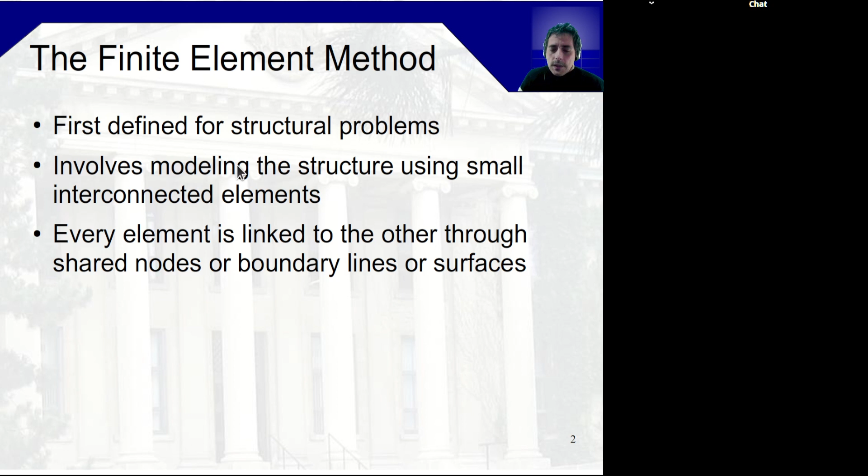Each element in that concept is linked to all the others through shared nodes, or boundary lines or surfaces if you're talking 2D or 3D. So you have these surfaces that connect the elements, but the nodes are where things are getting calculated.

Yeah, you have a question? No. I have a feeling that...

So you can certainly select this - first you need to discretize your domain, and... let me just check one thing.

So first we need to discretize the domain, just as we needed to do in the finite difference method, where usually we would have a grid. It doesn't need to be a regular grid even in finite difference. But in finite element, you can more easily follow the shape of the elements, so the specific grid in the back is not so much needed.

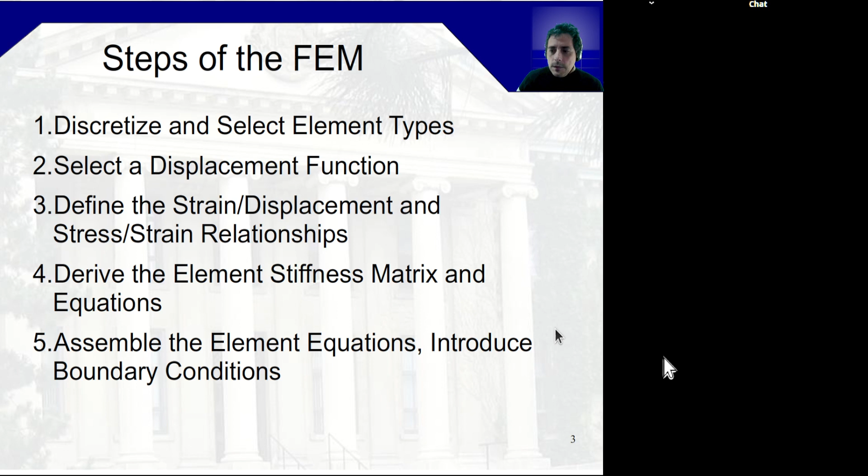So you define the stiffness matrix for each element, and then your job is to assemble the individual elements into a bigger matrix. Then you introduce your boundary conditions, and once you have those, you can solve, calculate your displacements and your reactions, and then as usual you have to interpret the results.

So first step: discretize and select the types of element. Steps 1 and 2 are tightly related because the element types you choose will determine the number of nodes, and based on the number of nodes within a given element, that's what determines the displacement functions you'll use for interpolating within the element.

So you select the type and shape of the element, and what's important is that the element must be small enough to give useful results and large enough to reduce computational effort. And remember, although we don't have in finite element a specific requirement as we do in finite difference...

particularly in time-dependent finite difference problems, where we need to make sure that when using the explicit finite difference method, the term 1 minus 2r is always larger or equal to 0. That requirement doesn't exist per se in this method, but it still gives you an idea when you choose a specific time step or a certain size of elements—it will still constrain you to the time steps you can use.

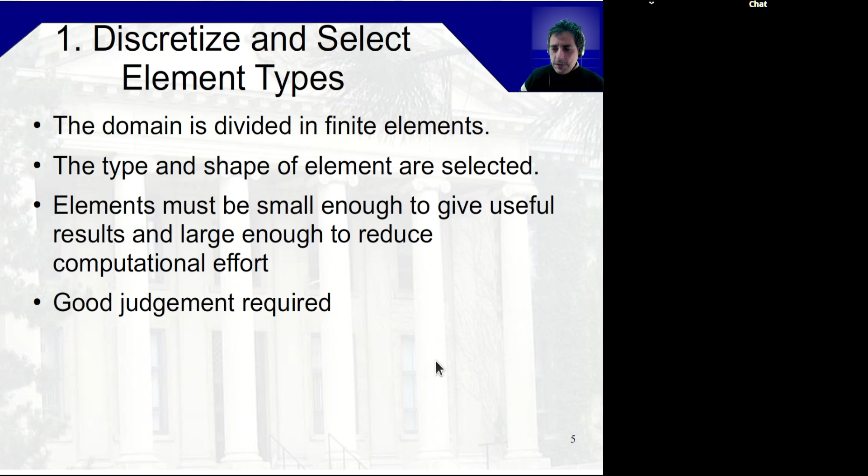Oh, okay, thanks. Thank you for mentioning. Let me make sure that I have the auto switch on. Okay, yeah, because of the initial technical difficulties, I forgot to turn it back on.

Thanks. So we ended up having our equations, right? So hi minus 1, minus 2hi, plus hi plus 1. Now, you remember this was the case of the steady state?

Okay, now just to examine these statements a bit more, we had already defined...

Oh, you're still getting me? I seem to be. Okay, I'm sorry about that. I really don't know what's going on. No, I use the national... well, that's not the issue. I've been having excellent connection all day. I use National Capital Freenet, which uses basically Bell's phone lines. No, no, it's not through Rogers. It's basically using the DSL lines that I'm using. Um, and it's something strange, just at this particular time. I'm not sure, it might have to do with the network itself, but it's strange. So in any event, so I have this.

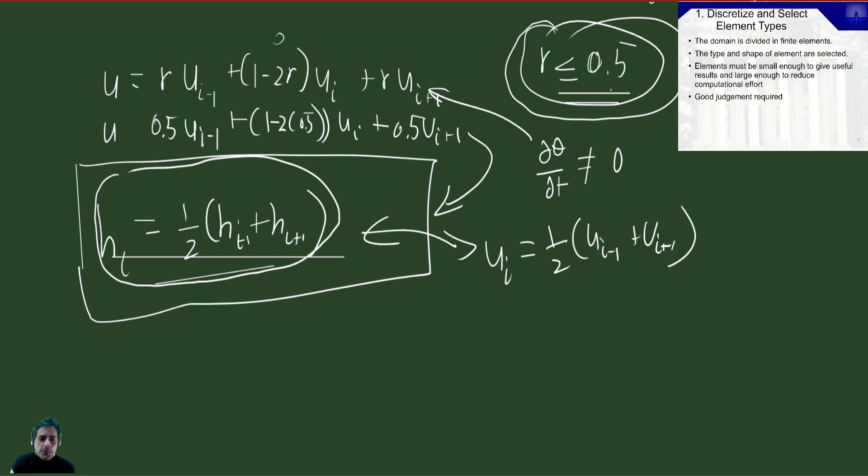We ended up with a general equation that, when we set it to its possible limit—the maximum speed at which we can have things travel—we basically got the same equation as saying steady state, setting steady state as our equation and solving it iteratively rather than in one step through inversion of a matrix.

I just thought that was an interesting detail to show you. So when we use finite element, we always go to the solution using inversion of a matrix. The finite difference method has multiple ways sometimes to solve the same problems.

In the finite element method, you have to generate this matrix, invert it, and solve for it. You do have to choose your elements wisely to optimize the computational effort and have sufficient resolution in your problems.

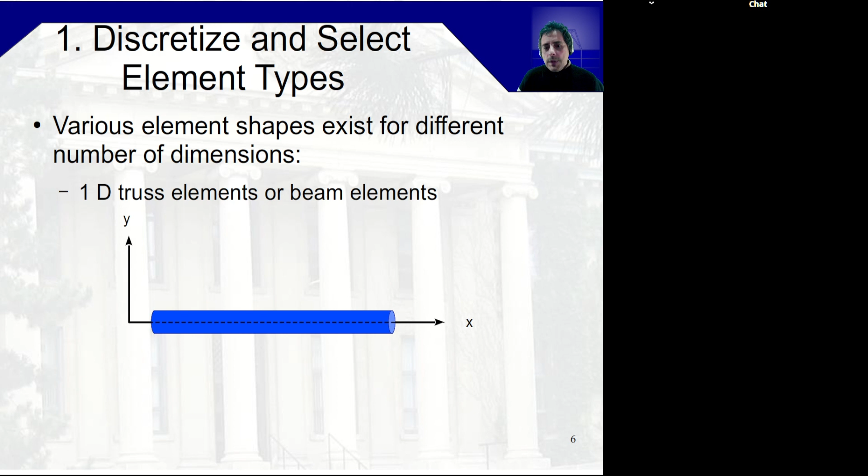So you have different types of elements that you can use. For instance, in 1D you can use 1D truss elements or beam elements. You can have bending, you can have compression, depending on which directions it can go. In 2D, you will use flat elements.

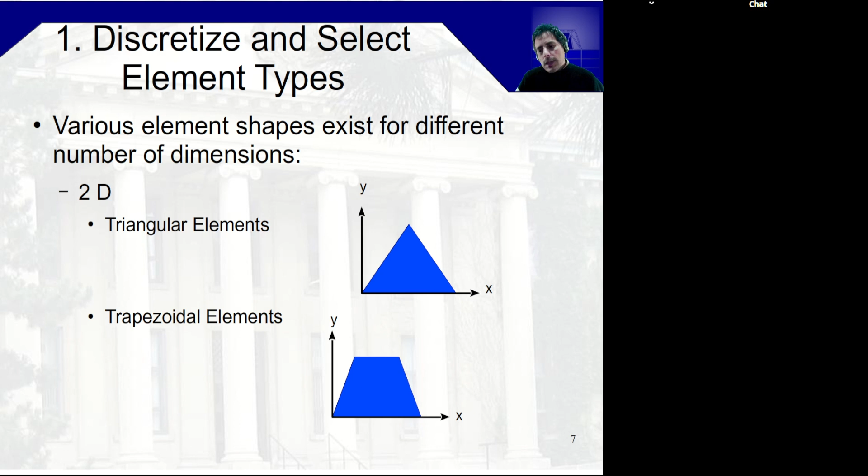The simplest is the triangle, and within them you can do linear interpolation. You can use trapezoidal elements. As you add nodes, you end up changing the functions that you use to interpolate within the element.

You can use prismoidal elements in 3D, with tetrahedral elements being the simplest. As you add sides, then you add nodes, and your interpolation functions—your shape functions—are different. Of course, you can also do 2D that tries to be 3D, as in axisymmetric problems.

Once you've chosen your elements, depending on the type of problem you have to solve, the second thing you have to do is select a displacement function. The displacement function is chosen within each element—that's an interpolation function within the element.

You only need it in the end once you want to be able to calculate the changes within any element. It's like solving your finite difference problem and then trying to find values at intermediate positions—you might use an interpolation function to use the nodal values and calculate values anywhere in between.

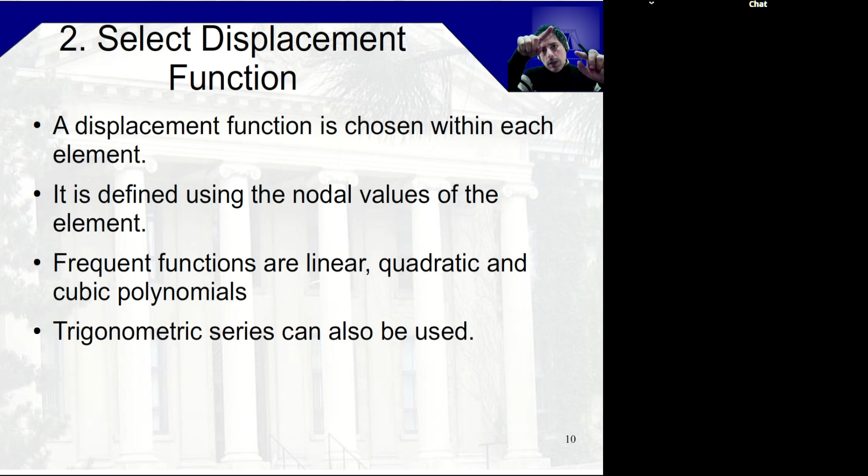Then you have to define your strain or displacement, stress-strain relationships. For 1D, for instance, you can define the linear strain as the displacement, the change in position over x or the direction—change in length over the direction.

And then you relate that to the stress using constitutive relationships. Again, for simple elastic deformations, your constitutive relationship is Young's modulus times the strain. So you define the strain in terms of

change in positions in each direction, and then the stress is therefore the strain times the Young's modulus. That's your constitutive relationship.

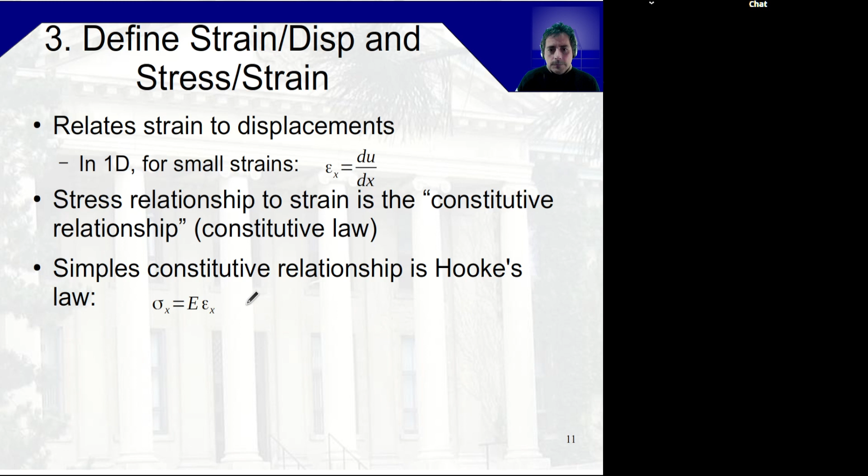And then you build the element stiffness matrix. There are different work methods to determine the element stiffness matrix. We're not going to go into detail on all of them—this is a very cursory, very brief overview.

There are other courses that concentrate entirely on finite element methods, so we're really just going to breeze over these methods in this class. But there are different ways that you can generate your stiffness matrix, making different assumptions, and some are more appropriate depending on the type of problem you want to solve.

So, do these methods have any advantage over one another? Yes—when you have finite elements, which is better depends on the technique. Probably the work energy method, or the method of weighted residuals, I would say is the most general application. Once you have a differential equation, it's the one that will generally allow you to solve more types of problems. It's the more general way of formulating.

Basically, you're doing the same thing in all cases, but the method of weighted residuals is one you might want to research a little if you want to implement the finite element method on your own, because it allows you more flexibility. Galerkin's method is one of the branches of this method. Yes, you have these methods exactly—that's the most general.

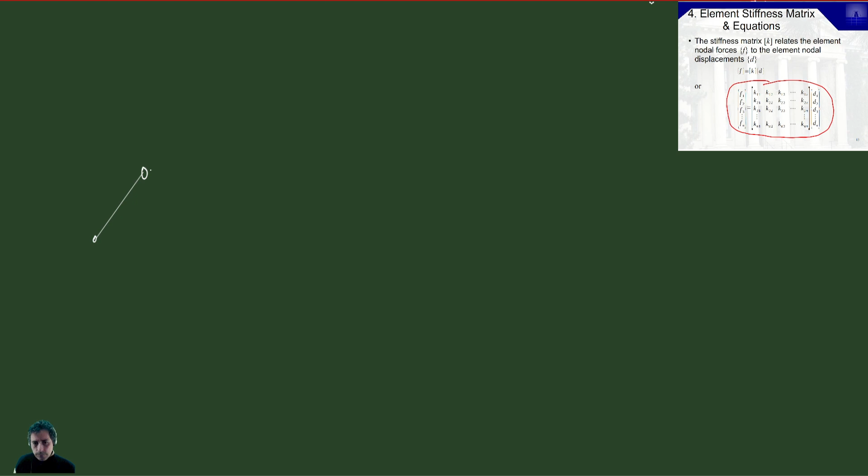And so they will be related in the global sense. If you have a list of all your nodes in your domain, you have a structure defined somewhere in space.

Okay, so you will have nodal displacements. This is a 2D problem, obviously, although each element is 1D in the case of a truss, so it does simplify many things, but the displacements are still 2D.

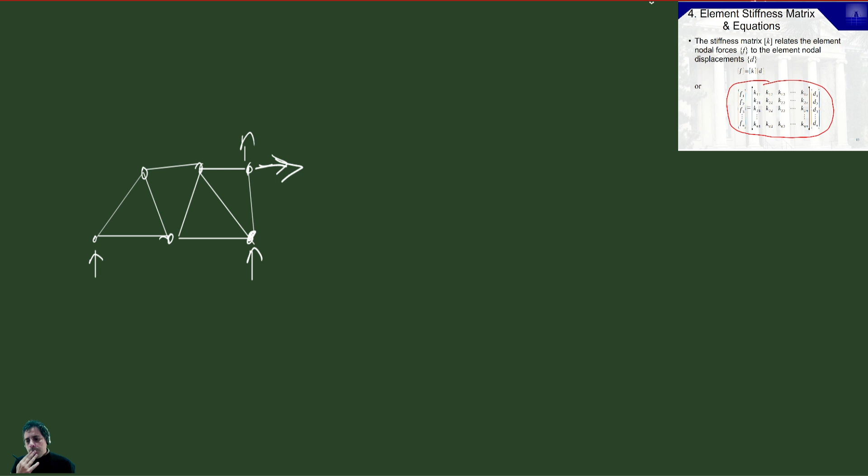And so you need to relate the forces that act overall, so you'll have boundary conditions at the boundaries and applied forces at given nodal locations. And then you'll have the general stiffness matrix that relates that to the displacements. So you want to be able to solve for the displacements, but also the forces that exist.

Now, the direct stiffness method allows you to superimpose elemental nodal forces. And so you're able to divide things into the individual elements, and later on you can combine them to build the general stiffness matrix, the global stiffness matrix.

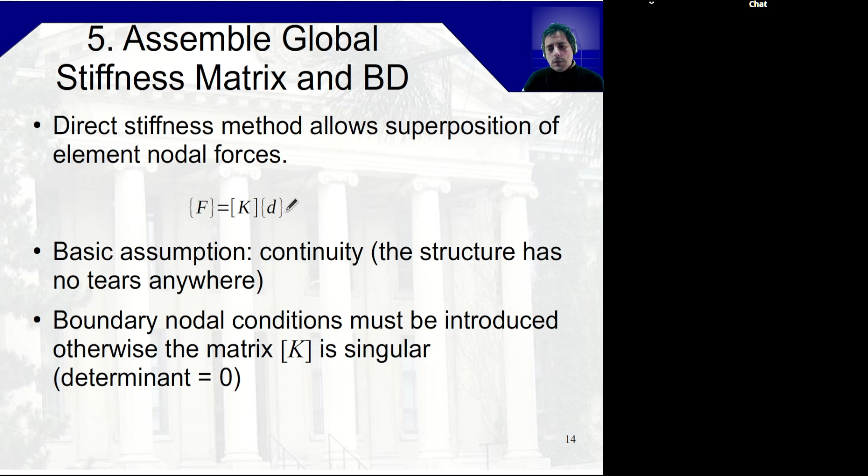So the basic assumptions to do this is that there's continuity, that the structure has no tears anywhere, and you need to introduce boundary conditions at some nodes. Otherwise, you have a singular matrix. You cannot solve it. The determinant is 0, and if you have a determinant equal to 0, it means that you cannot solve the matrix.

So if you have n, a total number of degrees of freedom, then you'll have to go to a matrix that is n by n, basically, because you have vectors of n elements. So that's all depending on the degrees of freedom, which are the number of nodes multiplied by the things that you're measuring at each node, right?

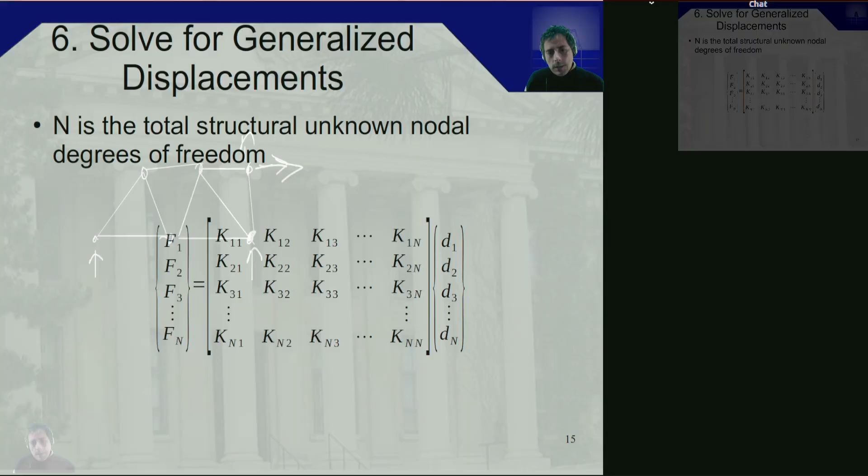So in this particular case of a truss, what you have is displacement in the y direction and displacement in the x direction. So you would have 1, 2, 3, 4, 5, 6 nodes times 2 degrees of freedom per node. So basically 12 global degrees of freedom.

If you had beam elements, then you would have to also measure rotation, and so you would have another degree of freedom at each node.

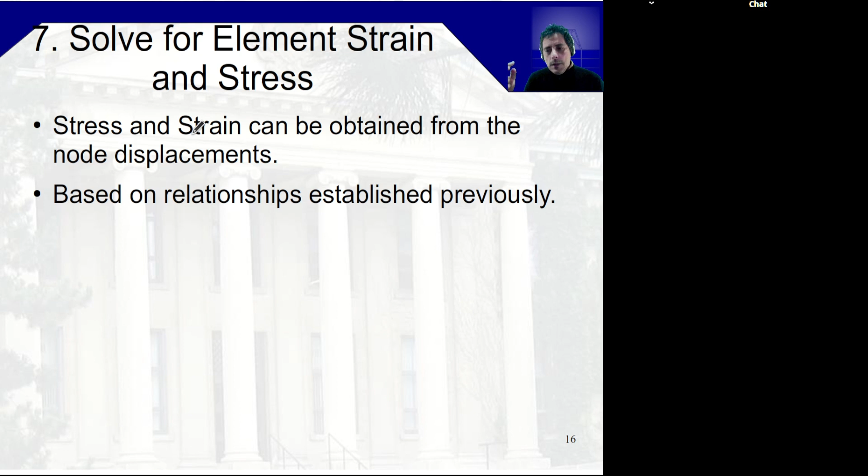So you can get stress and strain from the node displacement, and then from there you can interpret things within. Interpreting the results, that's important in all types of problems, not just for finite element, that's also for the finite difference problems, right?

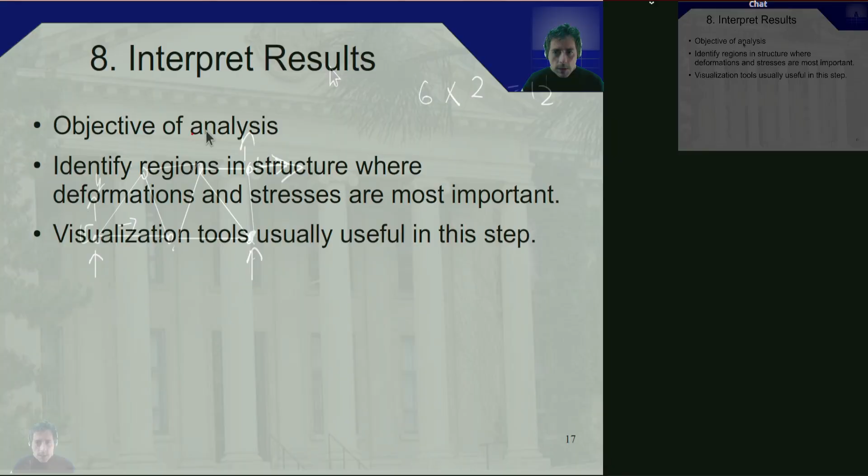So if I give you a problem, whether you solve it by finite element or finite difference, I give you a dam. Maybe it has a clay core of some sort. And so you do an analysis of flow. You identify the ground or the phreatic line, right? And then you can generate contour lines for your equipotentials, right? And they will be tighter.

You have more head loss within the clay, so you will have all kinds of interesting things happening there. Whether, however, you've solved for that problem, interpreting what it means, interpreting what are the consequences of those, will be your job looking at the analysis.

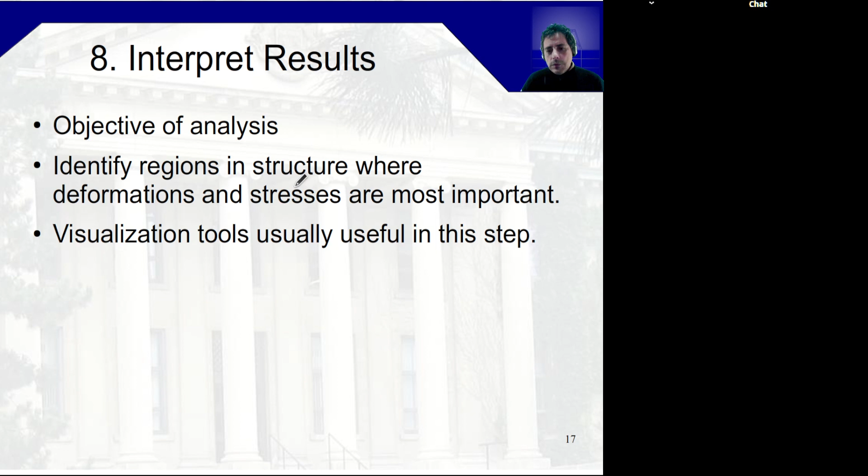So whenever you have, say, equipotential lines that are closer, then you know you have higher head loss, you have greater gradients, and likely less flow, and the flow will tend to prefer the path that has less head loss, right? So same thing when you're dealing with stresses, you'll have to determine, look at the picture, look at the data, and identify what's more important. So usually you need to have some nice visualization tools for this step to be able to make the most of the information you get.

So if we want to look at this, let's look, for instance, at a 1D spring element. So this is the simplest form of a finite element problem. And in the case of a spring, then the spring constant is equal to AE over L.

If you can imagine that you have a bar, we can represent a bar if you have a steel bar like in a truss. But in this case, we're doing 1D problems, so you would imagine bars that are only lined up like this. It's a 1D problem, so you could represent the spring constant of a bar as AE over L. So the spring problem is not only good for solving spring problems, it's also good for solving bar problems.

It's also good so if you have a bar in torsion, you can then use the polar moment of inertia and the shear modulus over L, and then you can model bars that are in line in 1D and then are being torqued. So you could have bars in 1D and that you simulate how you torque them and have the torsional movement. So the 1D spring element can be used for other things than just springs.

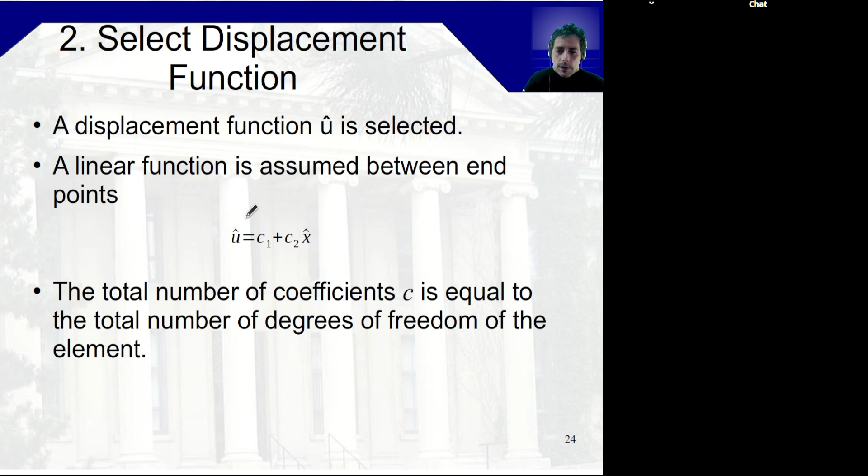So you have the deformation equal to constant 1 plus constant 2 times x. The total number of coefficients c is equal to the total number of degrees of freedom of the element.

So basically the displacement is based on the relationship: you have 1, x, so x at any position along the bar, times the vector made by c1 and c2.

So how do you define this? You need to define your displacement, or your function u, at the nodes. So you have two nodes, you can be either at 0 or at L, where L is the length of the element.

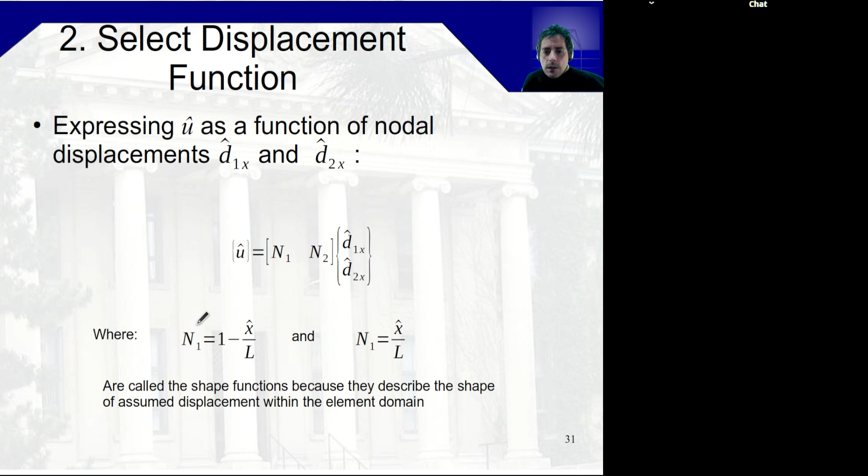So you have x over L times displacement 1 and displacement 2. N1 and N2 are your shape functions, and in the case of the 1D spring element, N1 is 1 minus x over L, and N2 is x over L. So basically one is measuring that direction, the other one the other direction.

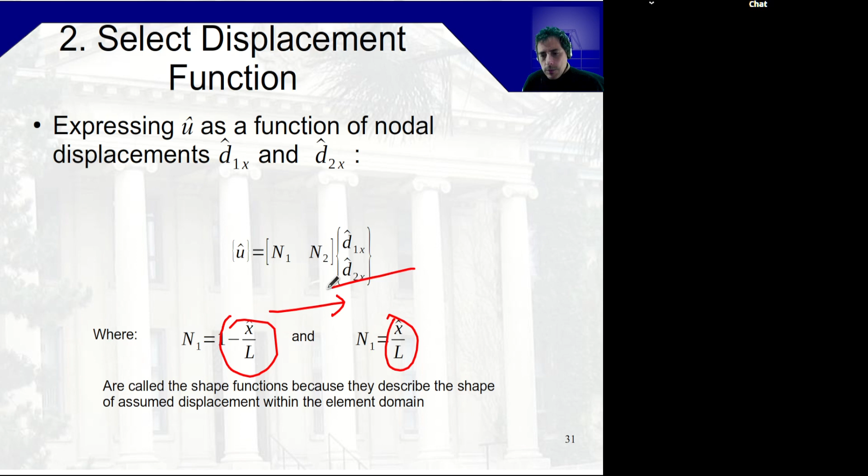So what is the constitutive relationship that you can use in this particular case? Obviously your constitutive relationship is the tension in the spring. You are breaking up a lot.

Let me see what I can do, if I can do something. I'm not sure what to do. Let me try something, I will come back shortly, see if it improves things. Just a sec.

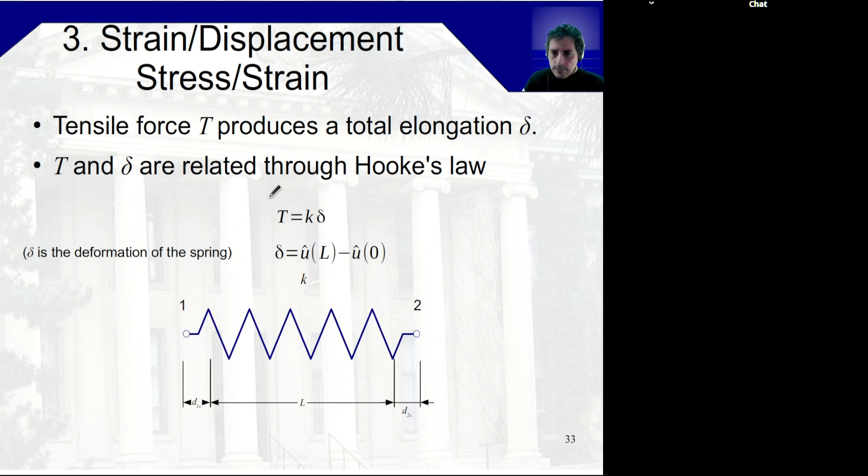Okay, you have the spring constant times the difference in displacement between the two ends, which is delta. So you have the difference, displacement at L minus displacement at 0 - it's basically the difference in those two displacements.

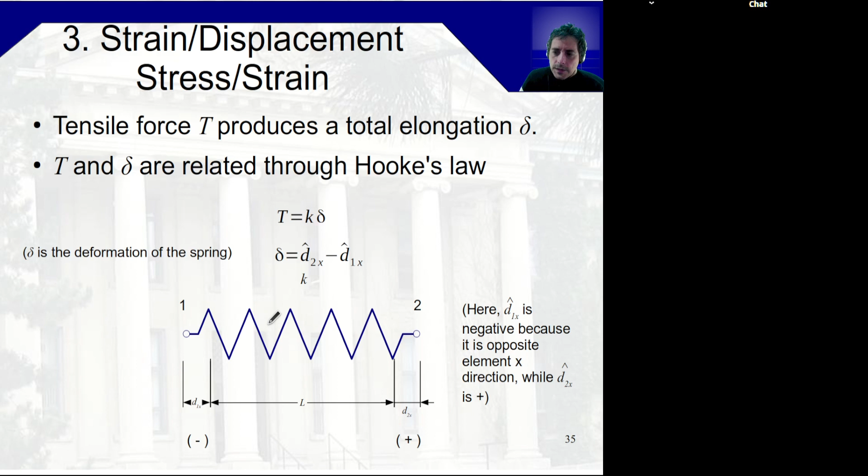And so in this case, d1 has a negative sign and d2 a positive sign, because they're in opposite directions, in the particular model.

So you have the sign convention: minus t at the first node and plus t at the other node. So we have both the tension and the displacement, which is the difference between the two nodal values.

So you replace that into the equation. At the first node you have minus f1x, which is the reaction or force at the first node, so it's equal to the tension, k times the difference in displacement. And at the second node you have k times the displacement difference.

So what changes is that obviously we have d1 minus d2 and d2 minus d1 when the values are - here we had minus f1 and this one we have f1, so that's why we ended up inverting the two signs. If you express it this way, you're relating the nodal forces f1 and f2 to the nodal displacement through the spring constant, and so we have here our constitutive relationship.

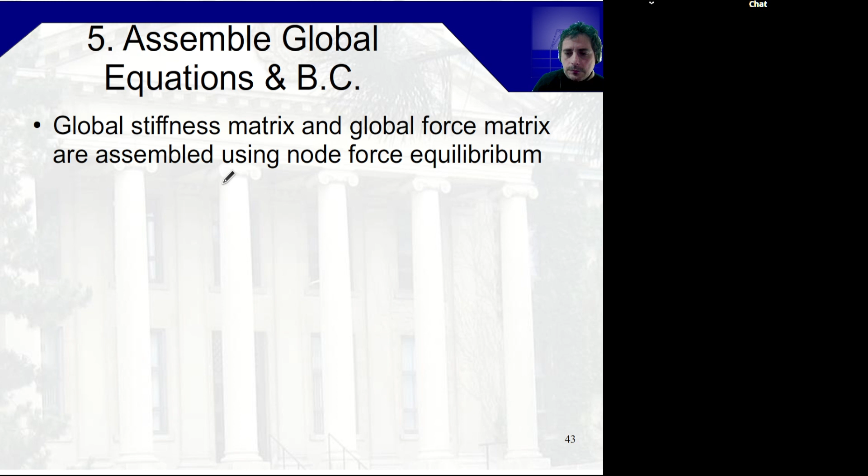So we have a symmetric square matrix, and then we can solve the global stiffness matrix by assembling them, so we would assemble them based on their nodes.

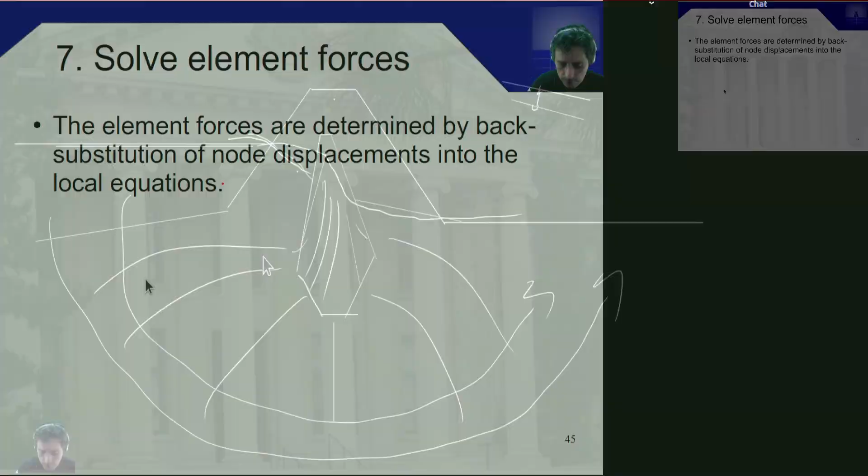So in terms of the nodes... oh, I'm missing a part here. Just missing an important window for my use.

So if we have a set of nodes, this is node 1, 2, 3, 4, that's element 1, element 2, element 3. So for element 1 we have, looking back at our equation...

So what did we have for element 1? Well, we have node 1 and 2. So we have K1, K2, K3, and we would have these two values there. So what would it be equal to? It would be equal to K1, minus K1, minus K1, K1.

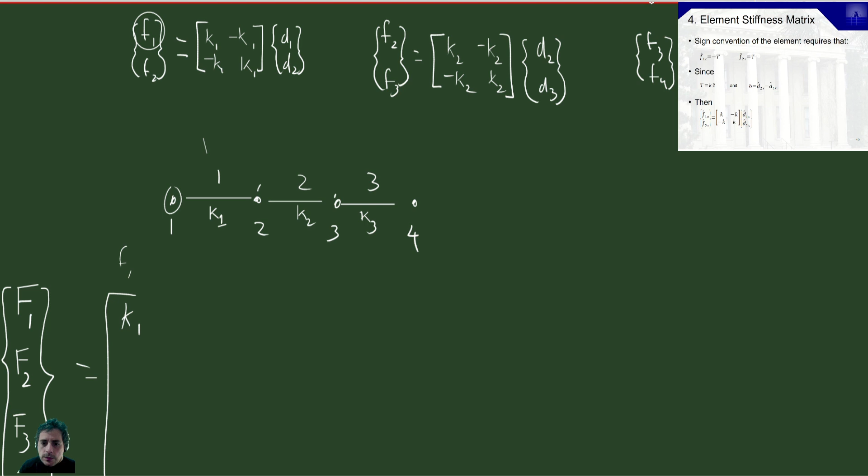Right, and so now we have to find the element. So F1 at 1, we look at F1. We have K1, with respect to D1, and then with respect to D2 we have minus K1. So that's what we're going to look at now, how we assemble these things into the global matrix. It's going to be faster if we look at this example, but we're basically going to add the values from the different elements.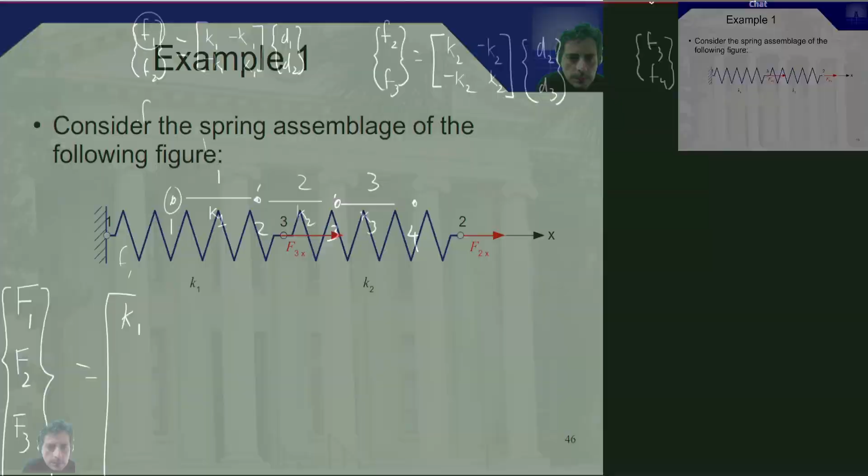Okay, so we had K1, so with F2, and so this means that F1 equals K1 D1 minus K1 D2, right? But if we were looking at F2, F2 was equal to minus K1 D1 plus K1 D2, and F2 was also equal to K2 D2 plus minus K2 D3.

So if you have here your nodes, you have displacement 1, displacement 2, displacement 3, displacement 4. And so for the global matrix, this is in terms of D1, D2, and so on.

So you have here for D2 and F2, so you would have minus K1, and for D2 it would be plus K1 plus K2, but it would also have, as a function of displacement 1, minus K1 times displacement 1, and then in terms of displacement 3, minus K2. So you end up with a matrix like that with elements from all of them.

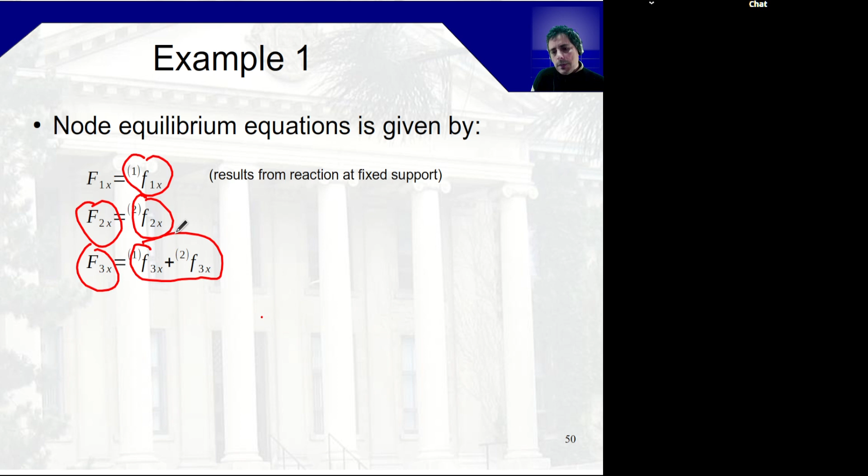Node equilibrium means that global F1 is equal to the element F1, global F2 is equal to the element F2, but global F3 is equal to the sum of both element F3. So we express them in this general fashion.

So F1 will be equal to whatever we have there for F1. There's only one term with F1, so it's K1 minus K1, D1 and D1 and D3. This is F1, this is F2, because F1 is equal to K1 D1 minus K1 D3.

F2 is equal to minus K2 D3 plus K2 D2. F3 is equal to minus K1 D1 plus K1 D3 plus K2 D3 minus K2 D2. So this is the term that we have here, basically just expanding the stiffness matrix.

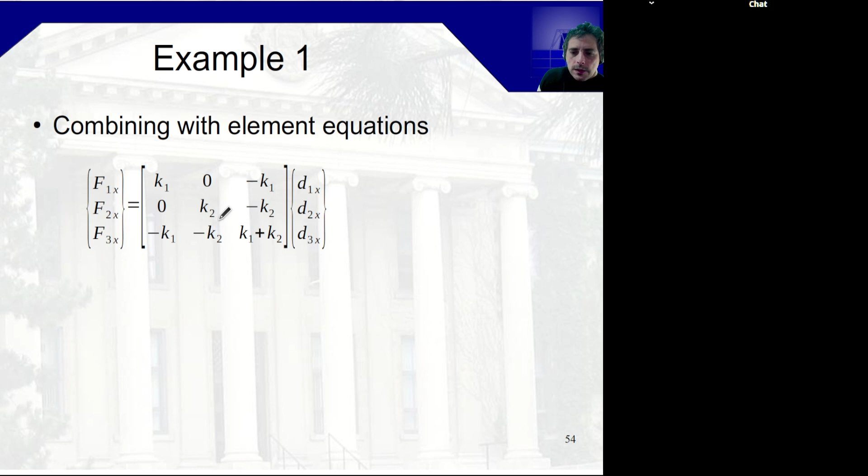We replace those. So if we order these D1, D2, D3, we just place the K values where we needed them to be. And so this is our global stiffness matrix. Call it global, that's how we usually refer to it.

So in terms of direct stiffness, we can just look at our individual stiffness matrices. This is the direct stiffness method, and so we add, whenever this belongs to node 1, this is node 3, so at node 3 we will be adding the same values.

So D1, D3, D2, D3. For element 1, it means that we have 0 in turn, so element 1 only depends on... let's build it here for element 1. Element 1 only has nodes 1 and 3. And so our final matrix, we know, will have nodes 1, 2, 3.

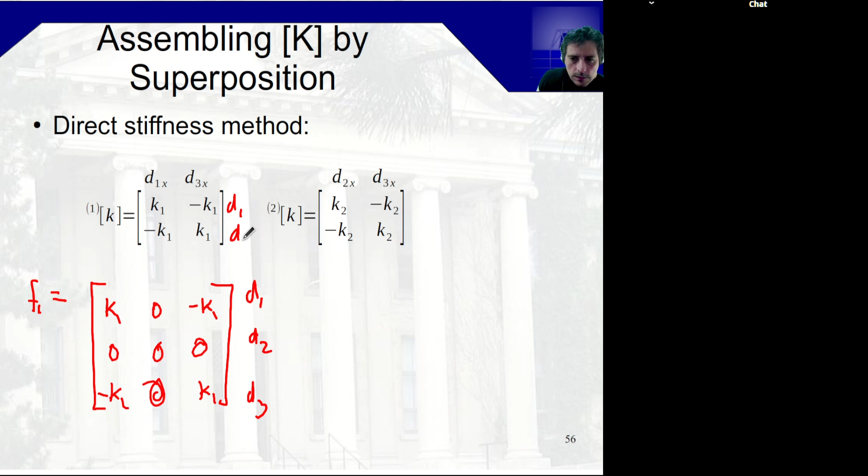But still, F1 has, in terms of D1, it has K1, and then it has D3. So in terms of D1 here, we have minus K1, and then K1 for D3. Zeros everywhere else. So that's D1, D1, K1. D1, D3 minus K1, D3, D1 minus K1.

Okay, so for F2, same thing. Position 1, 2, 3. So here we have 2. This is 2, 3. 2, 2. So that's K2. Position vertical 2 and 3, minus K2. Then we have 3 and 2, minus K2 and K2. And everywhere else we should have zeros, right? So that's what we have here.

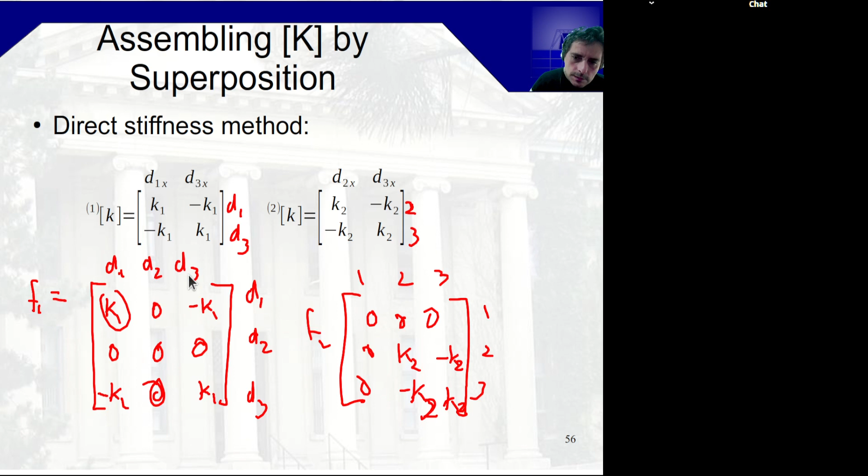That's basically how we build those matrices, and once this is done, because we are organized, I can have my global stiffness 1, 2, 3, 1, 2, 3. So position 1, 1 is this plus 0, so K1. Position 2, 1 is 0 plus 0, so it's 0. Position 3, 1 is minus K plus 0, so minus K1.

Then 1 and 2 is 0 plus 0. 2 and 2 is 0 plus K2. 3 and 2 is 0 plus minus K2, and then we have minus K1 plus 0, minus K1 minus K2, K1 plus K2. Okay, so we just assemble them that way.

And of course we can take out each of these values if we want, but we now have to consider the equilibrium of each of these functions. So we have K1 times the initial matrix times deformations, or we just assume the global stiffness matrix. So forces, the combined forces must be referred to the resulting values.

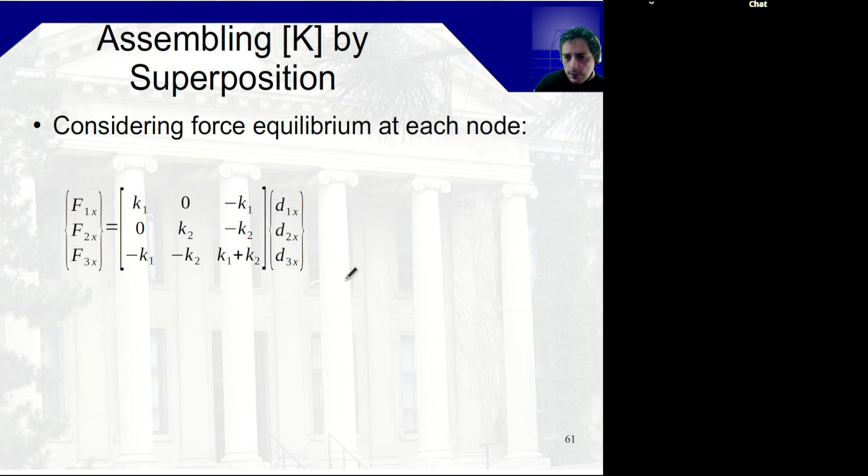And so what we know is that D1 must be equal to 0, that's one of the boundary conditions. We know that the first node cannot move, so we set this value equal to 0, and that's a fixed end. We also know f2 and f3, so because of that we can remove the first row, first column. This row and column are known, so we can remove those from the problem.

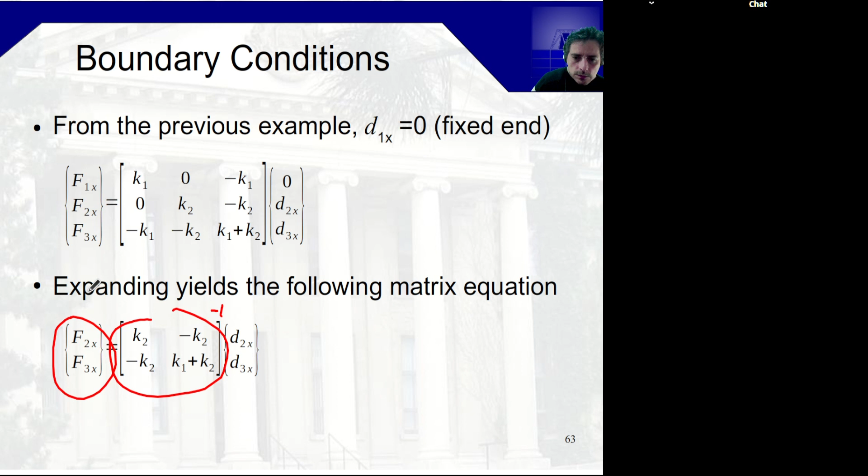We didn't know this value, so we were able to get it out of the equation. And now all we're left with is the two known forces. Potentially this could be 0 if we had no value there, but what we have to do basically is find the inverse of this matrix, multiply by the known nodal applied external forces, and that will give us the displacements.

So now we have the displacement at each location, and then we can go back and find our nodes. Once we have all the displacements, we can go back and find the reactions at each of the intervening forces.

Okay, so basically we can express... this is just resolving it algebraically, but we would have been able to resolve it numerically otherwise. Okay, so now we'll do another example with...

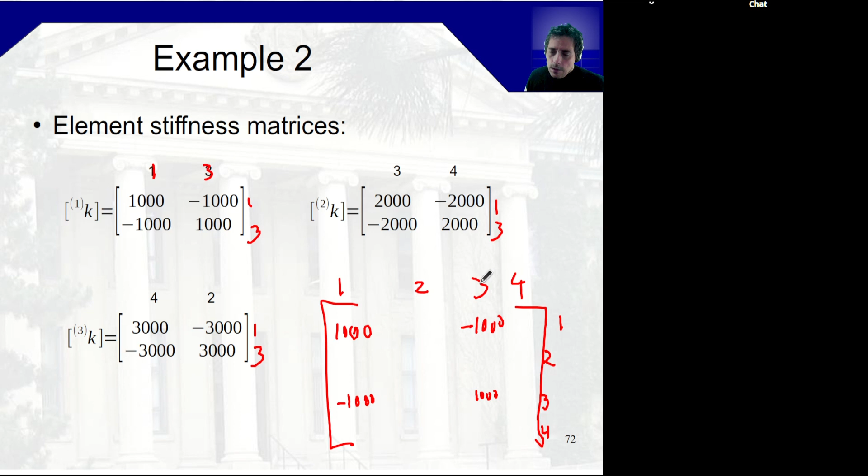Then we go to element number 2, which is 3, 1, 2, 3, and 4. So we go to 3. Oops, that's 3, 4. That's 4 and 2. So 3, 3, 3. So we have 2000. So 1000 plus 2000. Okay, so that will be 3000.

Then we have 3, 4. That's minus 2000. 4 and 3. 3 and 4 will be minus 2000. And 4, 4 was 2000. Okay, then we go 4, 4. So 2000 plus 3000.

2 and 4, it's minus 3000. So that's 2 and 4. And then we go back to 4 and 2. 4 and 2, it's minus 3000. And 2 and 2 is 3000. And the rest should be 0, 0, 0, 0.

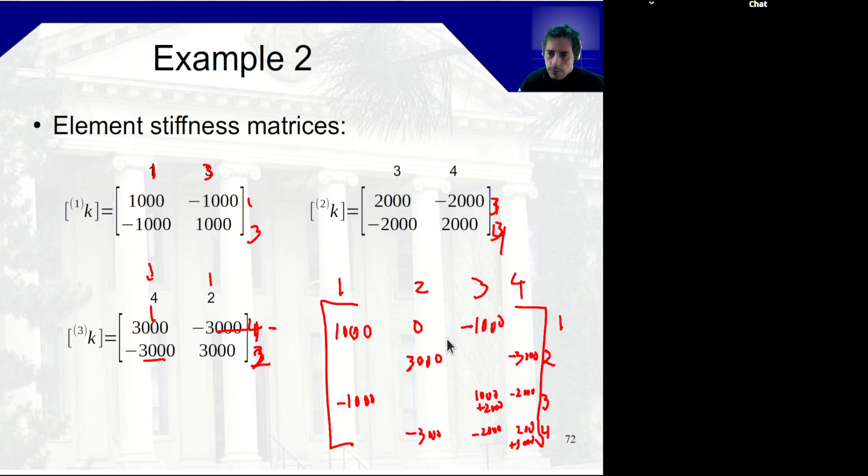So 2000 plus 3000, 2000 plus 3000, 1000 plus 2000, 1000 plus 2000 minus that. So you see there's all the values that we had there, and this is how we would build it from the matrix we have there. Okay, so this gives us our stiffness matrix, global stiffness matrix.

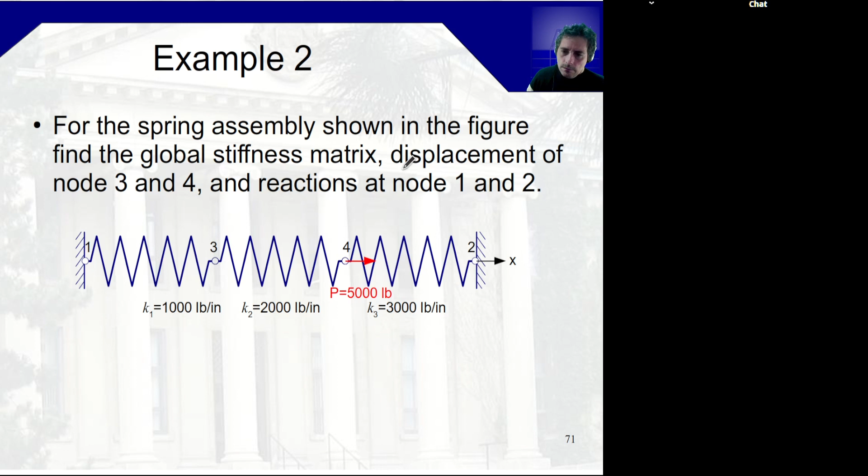We express the force at each of the nodes with respect to the displacement at each of the nodes. We also know that at nodes, what was it, 1 and 4? 1 and 2, okay. 1 and 2, we have 0 and 0. Okay, so 3 and 4, 3 and 4, we have 3 minus 2000 and 2000, so

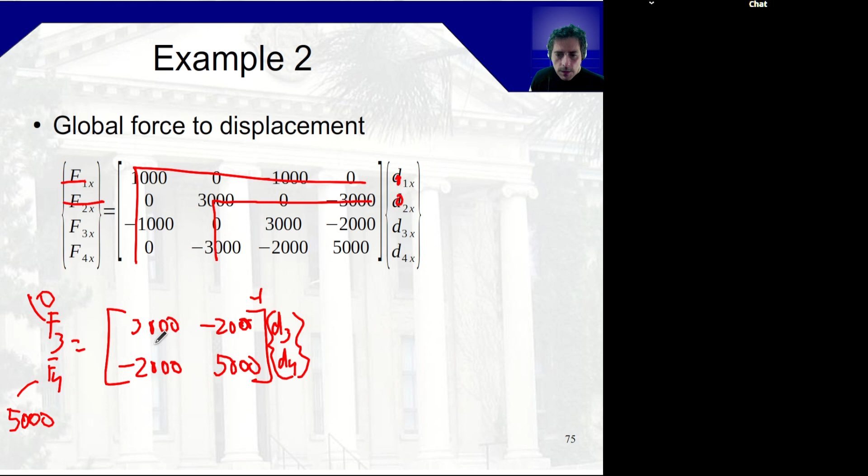Right, d3, d4, and so we find the inverse of this matrix. This one was 0 and 4, 5000. Okay. So that's 0 and this is 5000.

So we have the inverse times 0 and 5000, which will give us the displacement function. Okay. And so we can express that

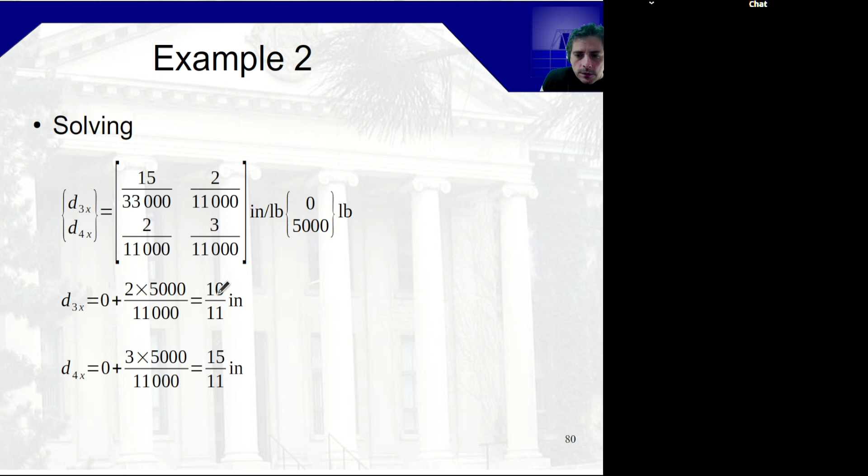in terms of their values. So we have displacements d3 and d4, 10/11 and 15/11 of an inch respectively. And if we put that into the overall system, we can find the reaction at 1 and the reaction at 2.

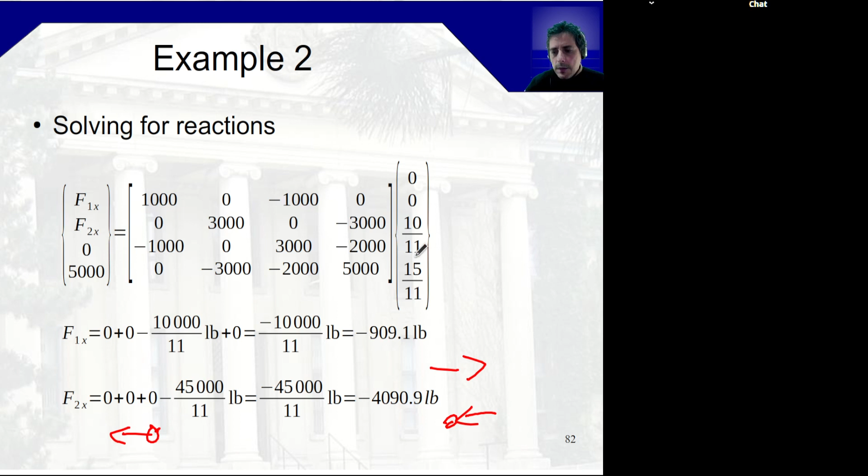And so that's the direction of the force. So the force is going positive in that direction. So it means that the reaction at 2 is in this direction. And similarly, the reaction at 1 is in that direction also, which means we have a tension here and a compression there. Okay, so that's the direction of the force in absolute terms.

So you can find then your reactions at each of the individual nodes if you want. And basically that's how you solve these little problems. Okay. Does sound straightforward so far?

Okay. So now we're just going to briefly talk about the material models. If you use SIGMA/W, you will find that you have different material models that are used internally. So SIGMA/W is the finite element component of GeoStudio for mechanical behavior, right?

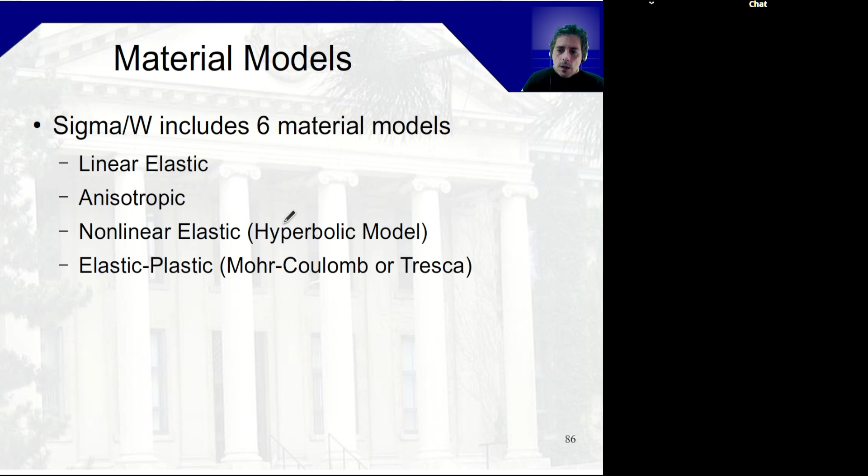So in terms of the elastic model, it's just relating stress and strain linearly using Young's modulus. You also need the Poisson's ratio, because when you're deforming a component mechanically by applying loads, this is the main difference between stress analysis and things like flow through porous media, where we had Q dependent on the difference in head in each direction. It's separate there, but here we are linking the Poisson's ratio, which basically links the strains between them.

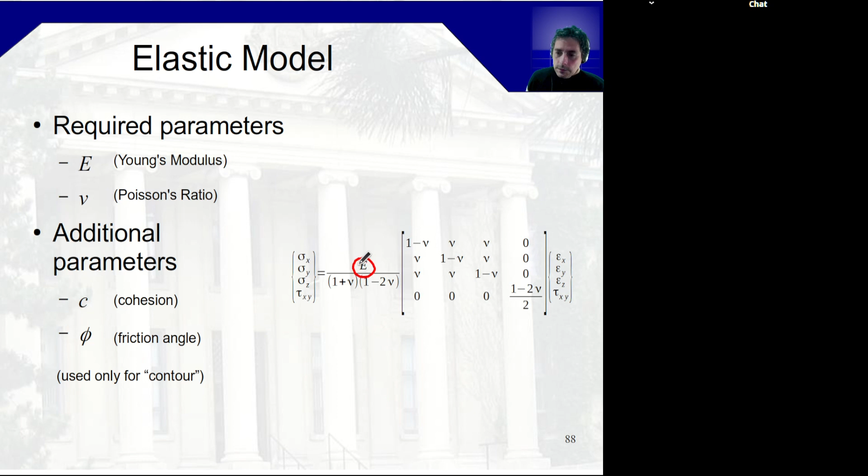So instead of talking directly about force and displacement, we're linking stresses to strains, and we have the axial strains and the shear strain. This is the constitutive model that relates them, and this is the stiffness matrix you have to use in that particular type of problem to relate the values. You can combine those, so technically this should be multiplied into each of those terms. When you calculate the terms in your matrix, the elastic modulus will definitely be part of the overall combination.

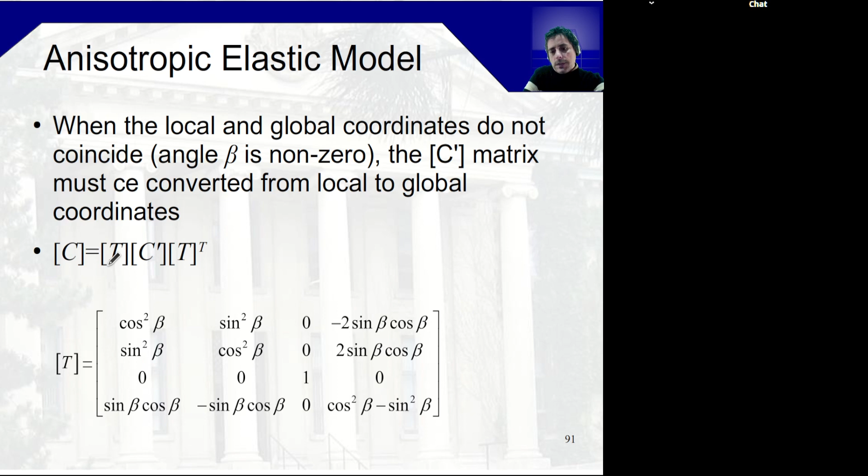In an anisotropic model, as I was mentioning, you should consider the difference between the elastic component in the x and y directions. And obviously there are ways that you have to consider the stresses in different directions. We already saw how to do the rotation of the systems of coordinates.

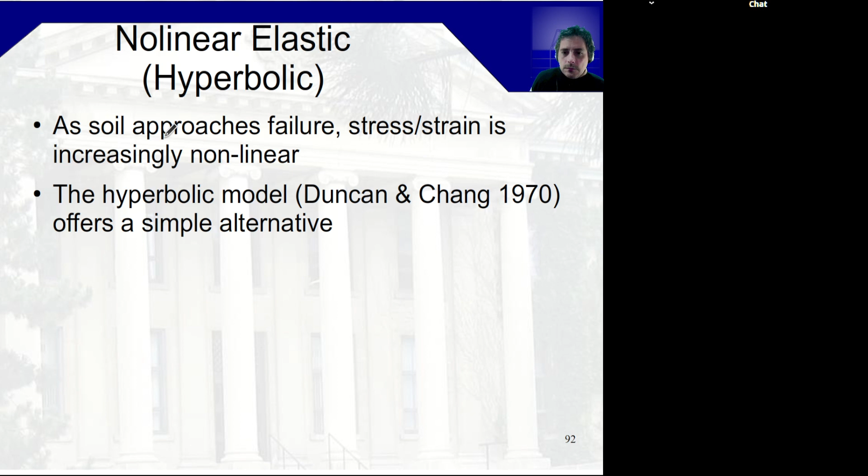So the hyperbolic model assumes that as you approach a maximum value, your elastic modulus is not constant but is instead a function of the stress in this particular case. In practice it is a function of the strain, but in the elastic model things are simplified. The hyperbolic model is also simplified, and what you're saying is that you're assuming loading going in one direction, and you're relating that to these terms.

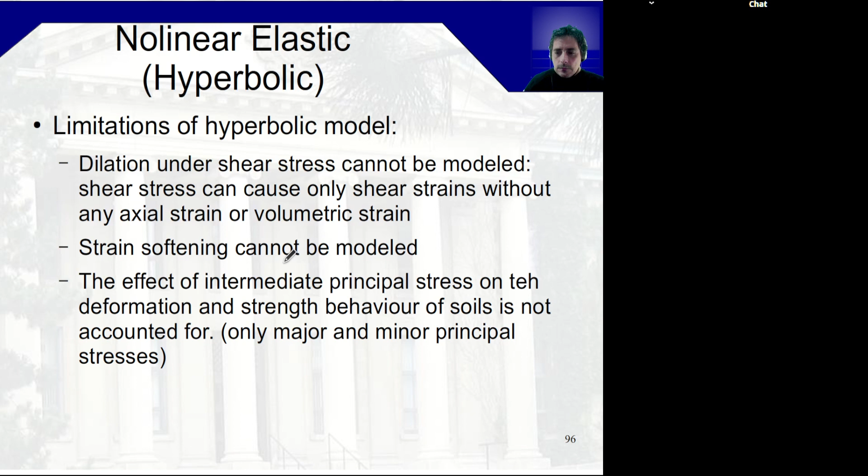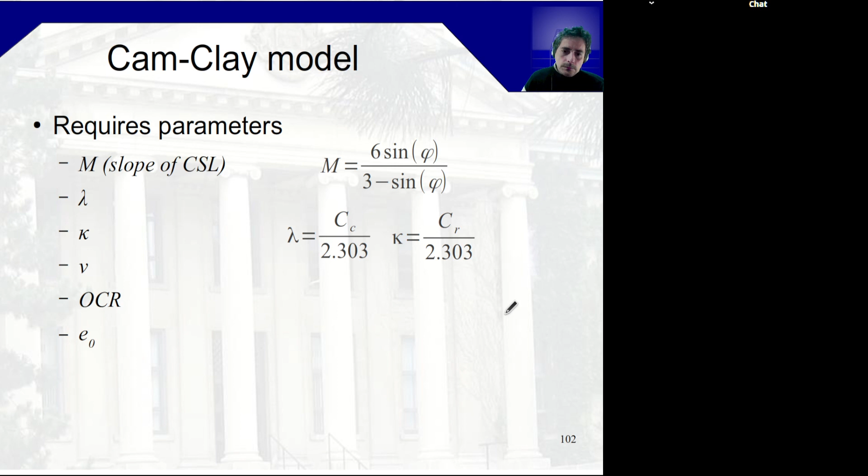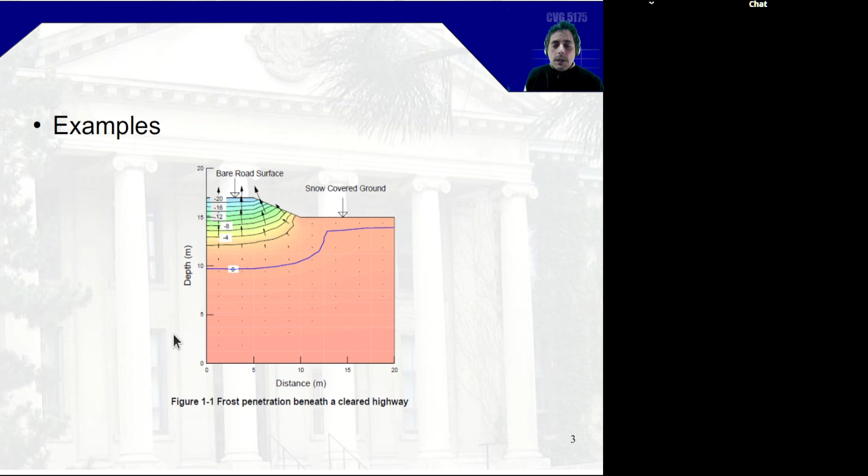Where are examples of problems where we would want to consider these things? In terms of frost penetration below cleared highways, we want to know how deep. So we can model using temperature models of the environment and see how far down the ice formation can go during winter, because we can have heave caused by the expansion of the ice.

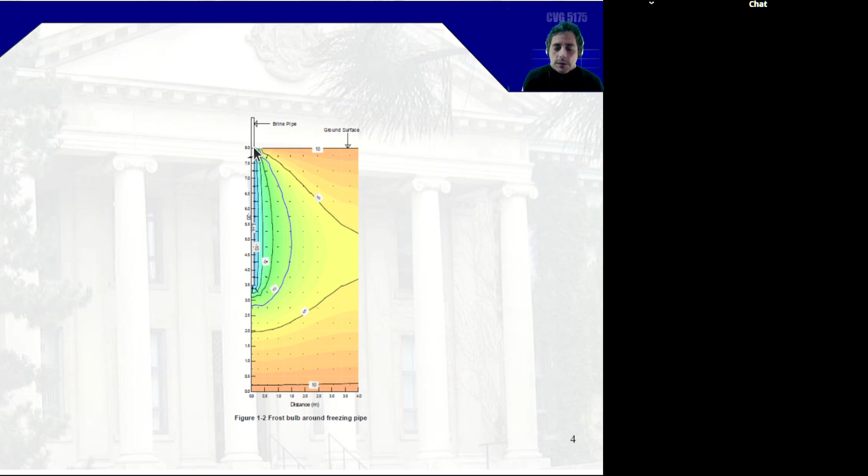If we have a freezing pipe, there will be a formation of an ice bulb, and either when it forms or when it melts, it can cause problems. Around shaft excavation, we can also have formation of ice or melting of permafrost, thawing of permafrost beneath structures, freezing around the chilled pipeline. That can be an issue also sometimes.

What's important to know is that we have very similar problems but different types of analyses, and the independent variable is usually what changes the most in these types of problems. So in stress strain problems, the independent variable is used to develop finite element models. What was the independent variable we used earlier today to work on the model?

We had the deformation for the spring constant, right? So in terms of stress strain, then the strain would become the independent variable.

In seepage problems, what was the independent variable we used when we were doing seepage problems, you remember? The hydraulic conductivity is the material property, but it was definitely the hydraulic head.

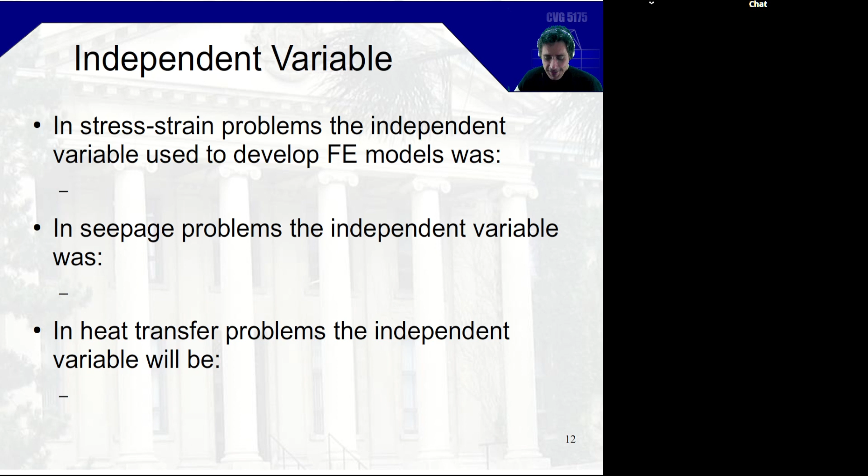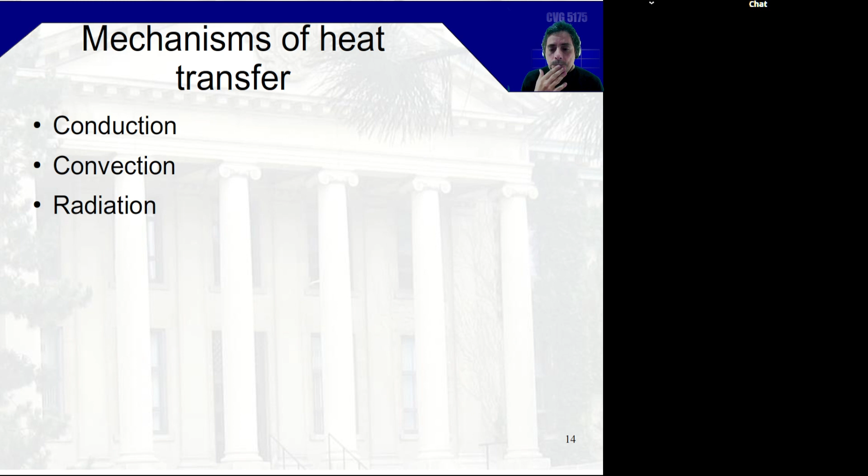So what do you think the independent variable will be when we do heat transfer problems? Temperature, obviously. So temperature will affect conduction, it will affect convection because it changes the density, and radiation aspects of it because the amount of heat radiated depends on the temperature. The higher the temperature, the higher the heat radiated.

Conduction refers to the flow of heat through the solids, within the material, through the collisions of molecules and free electrons within the matrix of the material. That refers to heat conduction.

Convection is a function of currents that exist. There might be currents induced by changes in density or existing currents. Say you have water flowing around a pipe that is chilled, or maybe a heat pipe. It can take away some of the heat because, through conduction, you will have heating of the water in contact with the pipe, but through convection, that heat is taken away with the flow of the water.

So that would be a case of forced convection. When you have a natural flow of water, that's forced convection. Natural convection is because of the heating process itself, which will cause expansion of material, change of density, and that will force also a flow. So there's two different kinds of convection.

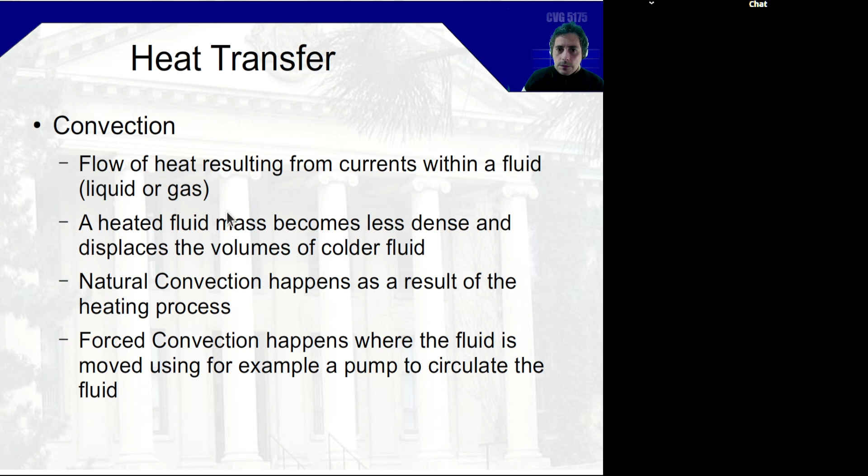Radiation itself is emission of electromagnetic waves, through light. It can be infrared, most of the time it's in infrared. If it gets hot enough, then it can go into the visible spectrum, and you definitely don't want to touch it at that point. It can be quite painful.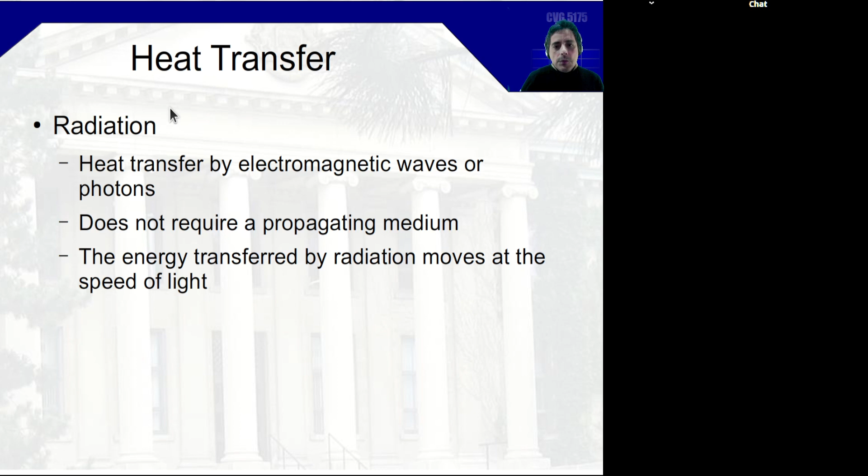Through radiation, the energy transfer is at the speed of light, or again, more than the speed of light, as I said before, it's the speed of causality. That's why the speed of light is indicated as c in the equations used by physicists, and c stands for causality, because that's the fastest you can go to have a reaction to something. No information, no causing element, can cause a reaction in something else faster than that speed. So it's the speed of causality that we commonly call the speed of light.

So there's typically two categories of heat transfer problems in most cases: steady state flow problems and transient heat flow problems.

We'll start looking at how to develop the equations for conduction, because you will see that it has many commonalities with seepage problems. In terms of heat flux, we use the same variable, the same letter as we did for Darcy flux. We call it Q.

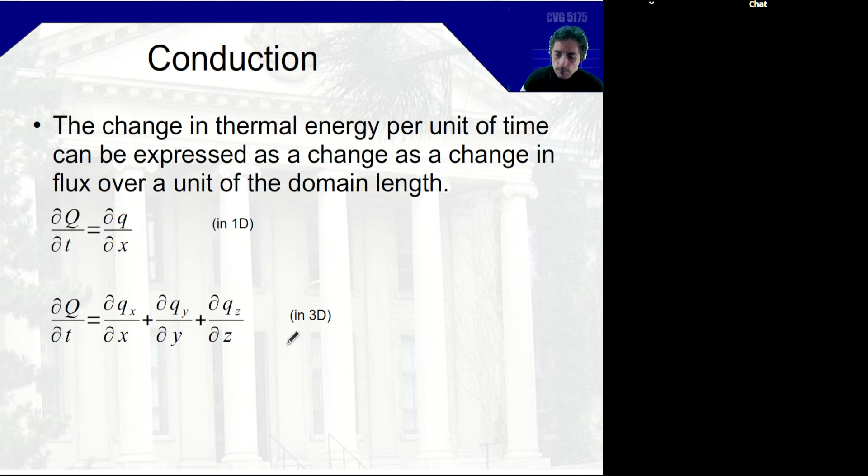But now we need to define the thermal capacity, which is the amount of energy transferred to an object for a given temperature increment. So something that has a high thermal capacity means we need to apply a large temperature differential, because it can store a lot of energy. You need to apply a lot of energy to get a measurable change in temperature. So the larger the value of C, the larger the increase in energy needed to have a measurable change in temperature.

So that should actually be delta Q over delta T. We can generally express it as dQ over dT.

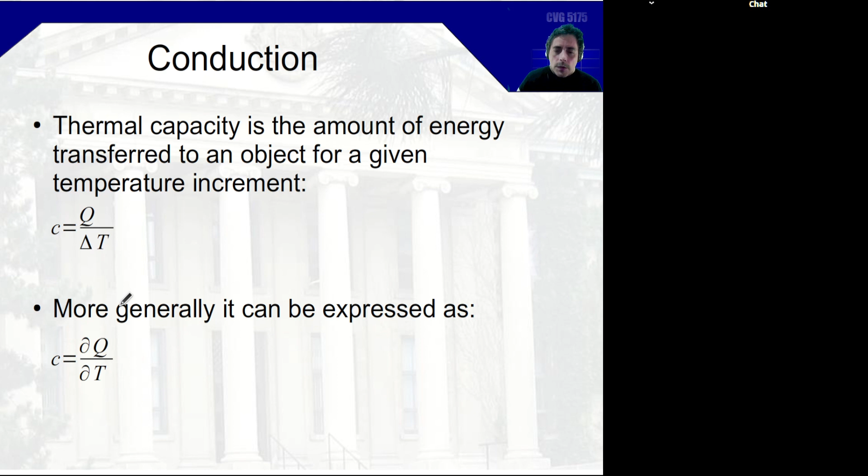You may often hear that water has very high thermal capacity. It's one of the best materials in that sense in terms of thermal capacity. There are very few, and certainly none as common as water. Water has many unique physical properties that make it unique in the universe. It's common, made in part with the most abundant element being hydrogen. It has excellent thermal capacity. So in terms of energy storage, that's why you will often see solutions that involve water to store energy, because it's very good actually at that.

So the change in energy is equal to the thermal capacity times change in temperature. That's an important relationship because it means we can convert our term dq over dt as c d-temperature over d-time.

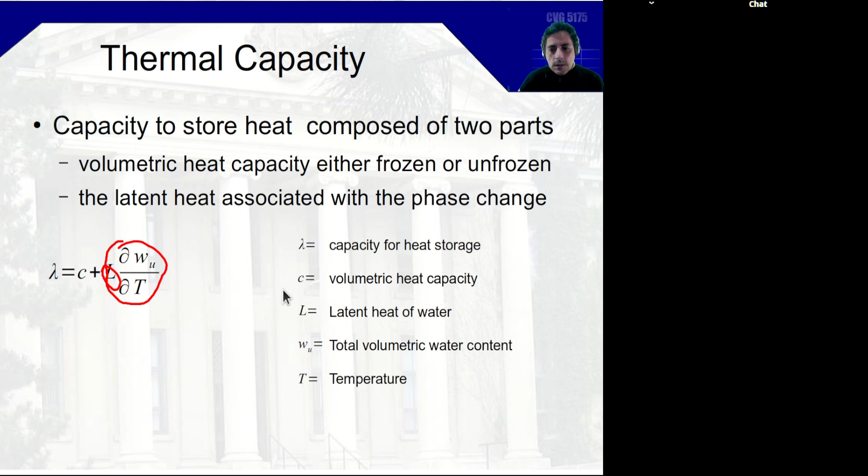Now you can also have the thermal capacity and the capacity to store energy based on the volumetric heat capacity, which we measured before. But it's also a function of the latent heat content - this is if you have a phase change, so you may be melting or freezing or evaporating. In that case, you might express that in this term, which will complexify the changes.

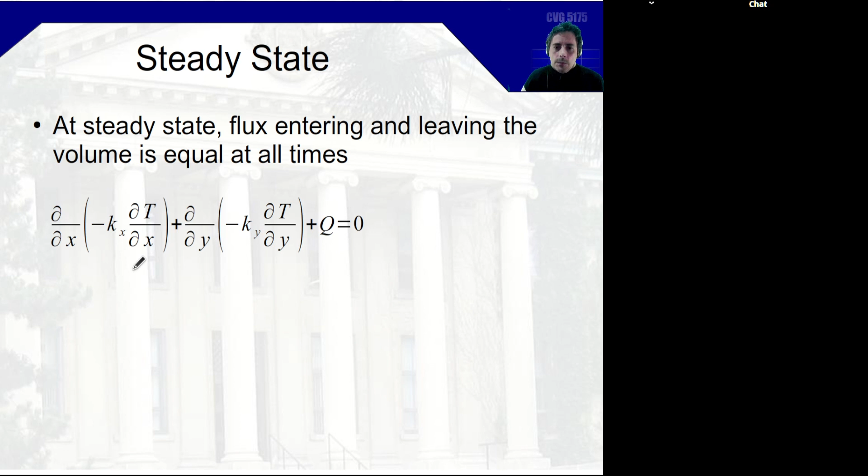So at steady state, what you have is the same amount of heat flux going in and going out. So if you have boundaries in that sense, you can definitely control by applying fixed temperatures here and there. If you apply fixed temperatures, then you can definitely have a steady state flow.

So GeoStudio can let you do heat transfer problems through the TEMP/W interface. GeoStudio has many - it's available in the computer lab, I think we mentioned it in the past if I'm not mistaken. It has SEEP/W that lets you do flow analysis, and you can combine the result of one into the other, and also into SIGMA/W that does stress analysis. So you can combine all these different aspects to solve for complex problems.

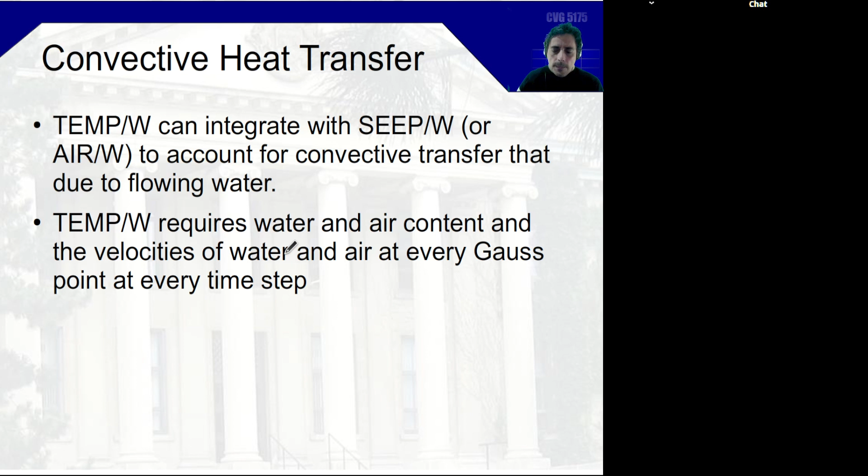So the convective heat transfer, that's something that in TEMP/W they use more as a boundary condition. They will not necessarily simulate convection within the soil, but you can have soil that is in contact with air or with a liquid, and there you will express a convective capacity to transfer heat away.

So you have a heat flux that will be calculated at the boundary, which will be dependent on H, the convective heat transfer coefficient for the process. And it depends on what process you need to emulate. You may have to do some separate simulation or go to literature. Say if you have a wind of this speed, this is the amount of heat it can take away for a given difference in temperature. If you have a surface, the boundary of your soil, at a given temperature, and the air is at say minus 30 degrees Celsius, and your soil is at 8 degrees, how much heat is being lost? Well, it depends not only on the temperature of the air, but also on the wind speed, and things like that. These are all factors that come into play in this parameter h.

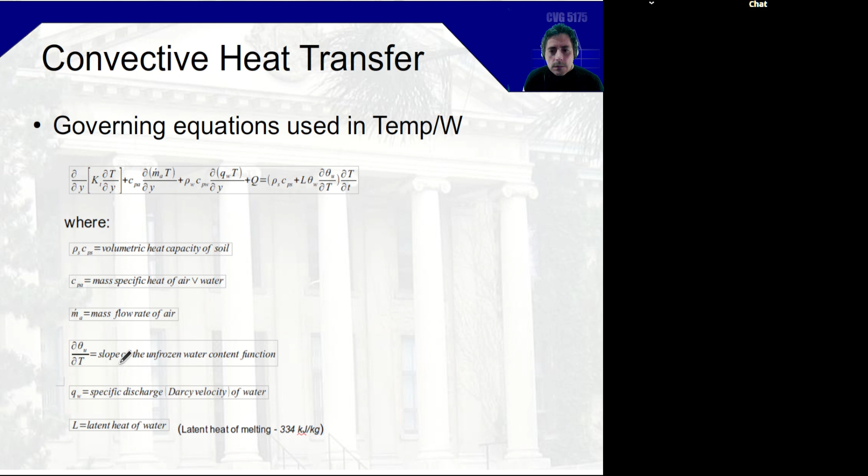So you have to have some idea of the process and how that process will convert a difference in temperature into a flux. It's not necessarily as straightforward as you might first think, so it's worth thinking about it. Now, in terms of temp W, the equations that it uses are listed here. As you can see, there are definitely different things that you need to take into account. I don't want to go into the detail, but if you're interested in using this software in your own projects, it might be good to have some idea.

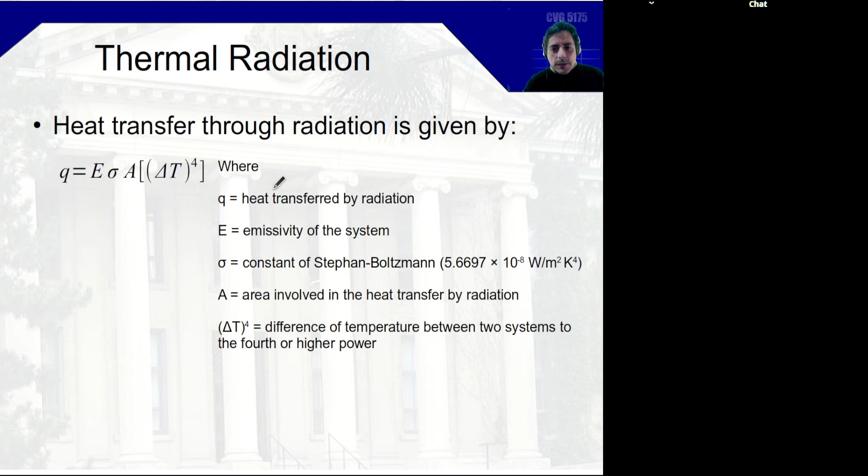Now, in terms of radiation, notice that the flux is a function of the fourth power of the temperature. So the more you increase the temperature, the more you increase the energy lost through radiation. Obviously, the Stefan-Boltzmann constant is very small, to the power minus 8. So it takes a large temperature before you start having a significant flow of energy through radiation. That's why at the temperatures we're usually dealing with, conduction and convection are usually more efficient. But if you're in space, those aren't very useful because you don't have much material in contact with the surface, so you won't lose heat through conduction or convection. That's why heat dissipation can be a problem for space habitats. But once you get the temperature high enough, you definitely get potentially a very high energy loss through the temperature difference.

So what's the emissivity, the other variable that you use for this?

Now, another type of problem you may want to solve is an environmental engineering concentration of contaminant problem. In those problems, we use Fick's law, which relates the diffusive flux to concentration, so the diffusive flux J to the concentration of solute under steady state. Does that look familiar so far?

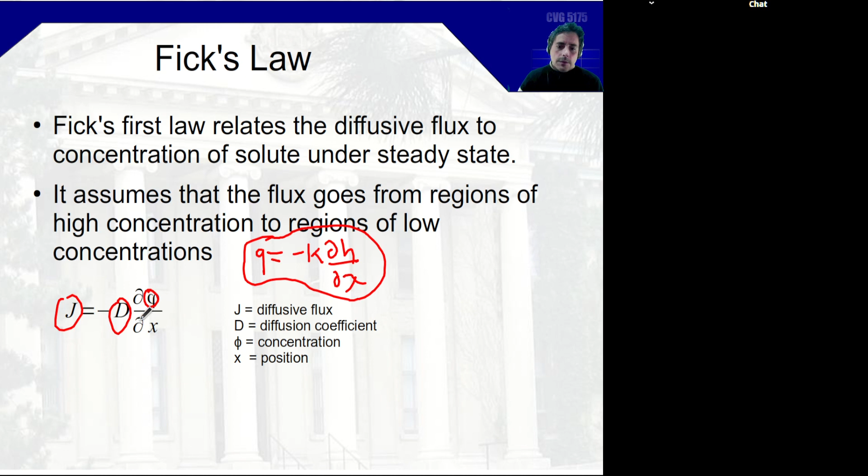Phi is the concentration, D is the diffusion coefficient, and that's the diffusive flux. Of course, concentration changes over time, and the concentration is a function of the diffusive flux in a given direction. So that's Fick's second law. Does this look familiar? Oops, that's supposed to be plus, not times, but plus, because it's a gradient.

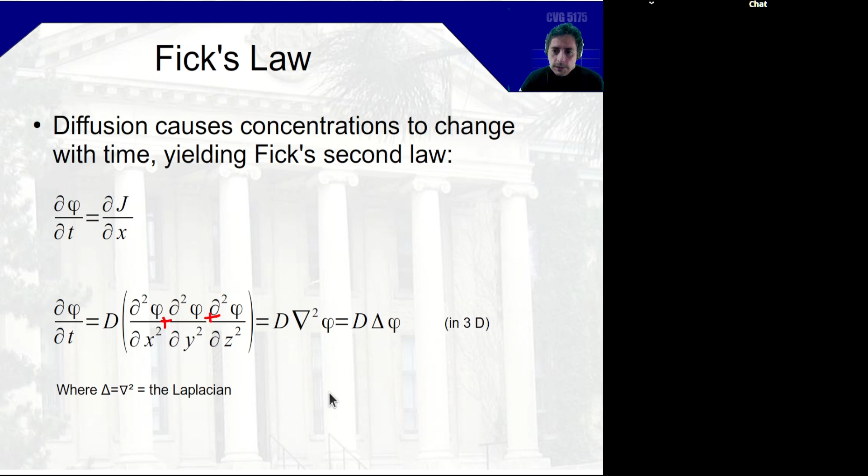So what you will find out is that there are many models that look the same. We have Darcy's law, where we relate Q to... for heat transport we had Q equal to... for Fick's law it was called J. And in Ohm's law, I'll have to check the variables, but it's basically charge transport, and it's the same basic equation. So in all those types of problems, you have exactly the same equation, and so you already have the tools to solve for them.

So with the tools we've seen in this course, although it may look like we've done a lot of the same type of problem solving, when you look at the different models you can have to solve for, you can realize that you have tools to solve a whole class, several types of different problems involving different physical phenomena. So I hope you feel a little bit better about everything we've seen, and hopefully you feel less scared about solving numerical problems.